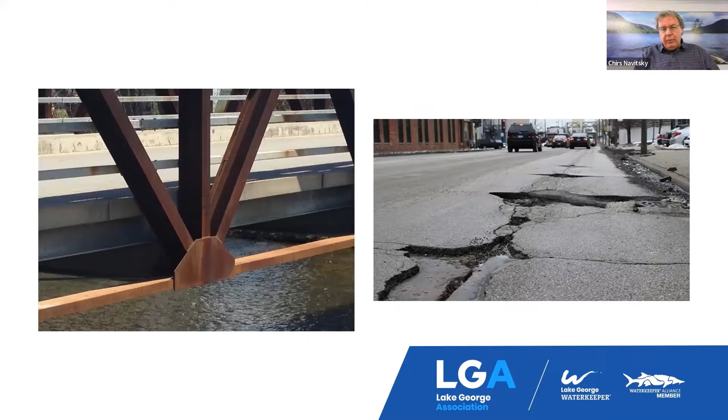So is salt really that bad? I mean, yeah, it causes corrosion, personal impacts, car destruction. We've all driven along the roadways and seen the burn on our trees, on our evergreens. It's said that 50% of the salt that gets applied to the roads actually gets into our soils and into our groundwater, and we'll talk about that in a little bit. There's corrosion to our public infrastructure, our bridges, our roads. The ice and snow get into the cracks in the roads with the freeze-thaw, and we are just going to be getting into that infamous time of year. So it does cause problems.

I love Maine lakes, I gotta say. I've kayaked on many of them, all the way from the Richardsons and Mooselook, Mooselookmeguntic, up through Moosehead and Chesuncook. So I'm gonna take Susan up on the offer to come up for our conference, but I love to get away.

But I wanna tell you about my favorite lake, Lake George. The largest lake in the largest park system in the continental United States, the Adirondack Park, 32 miles long. A famous lake; some of the first battles of the American Revolution were on Lake George. In the 1800s, the landscape painting schools were big here, with the dramatic vistas and the tranquility of the lake. 175 islands, many used for camping. It's a big resort tourist area, and that's our big economy. That's the Sagamore Resort on the island.

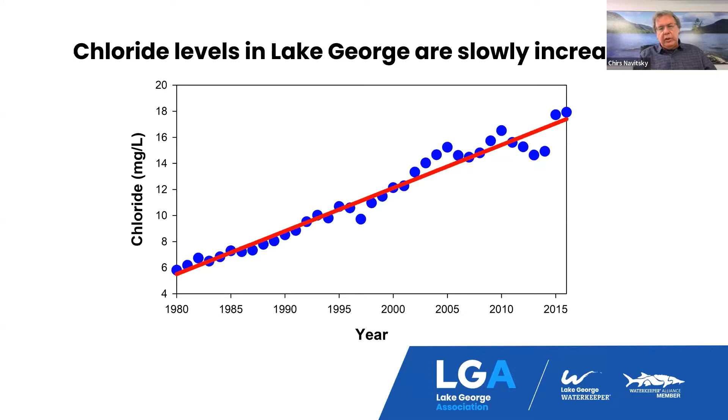We all realize that chlorides build up, they're conservative, and once they get in our waters, they are in our waters for good. We're very fortunate to have numerous organizations protecting and doing science on the lake. Around Lake George, they said there's 15,000 metric tons of public salt application annually. And that's only the public side. SIMA, the Snow and Ice Management Association, the industry that really oversees winter management, says that half of the road salt application is private.

So you can almost double that. So it could be as much as 30,000 metric tons of salt. So if it's 15,000 metric tons, you take railroad cars, that's nearly 300 railroad cars, nearly 3 miles long. So that's quite a bit of salt that gets added to our watershed, to our waters.

And we worked with the Albany Times Union out of Albany, New York, had them do an editorial, and this was what they used to put the editorial together and help us address our salt concerns.

But as with most watersheds, the chloride levels... Lake George is a big lake, billions of gallons, so it gets diluted a lot, but the chloride levels in streams can be 150 times higher. And this is where we see those toxic levels that can really impact the biota and the macroinvertebrates, and we'll talk about those impacts as well.

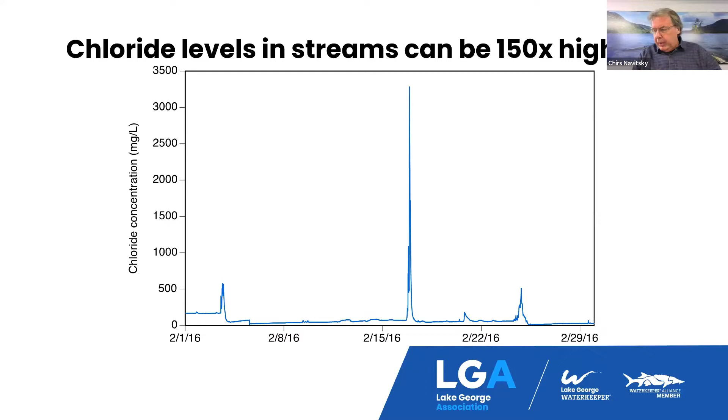112 wells were near local roads that are managed by local municipalities, and 114 of the wells were near state roads. And as we know, about half the salt actually enters the soil. So here are the results. Here you can see the amount of salt that gets added to state roads, and you can see the levels of sodium increase, 9 times higher than where there are no roads.

64% of the wells in this study downslope of state roads exceed sodium drinking water guidelines in New York State. So people with sodium restricted diets are now actually getting impacted by the winter maintenance. Look over at chlorides, you can see 156 times what we call background levels.

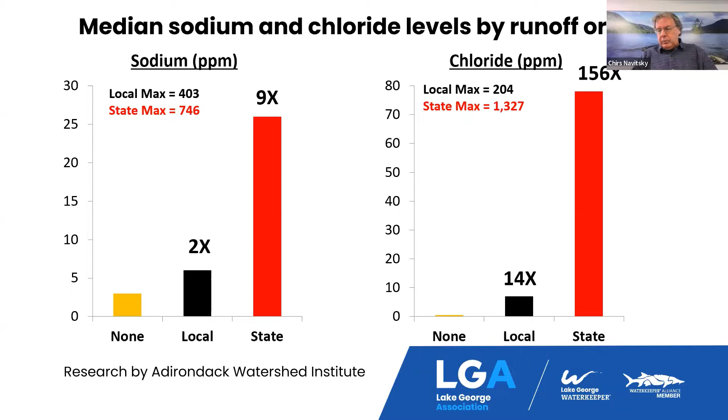Here you can see the maximum levels near state roads, the maximum level of chlorides in wells, over 1,300. The toxic levels on a daily average are 900 milligrams per liter. So here you can see they're well exceeding that. So yes, there are concerns, but it's not just our drinking waters, it's also our ecosystem.

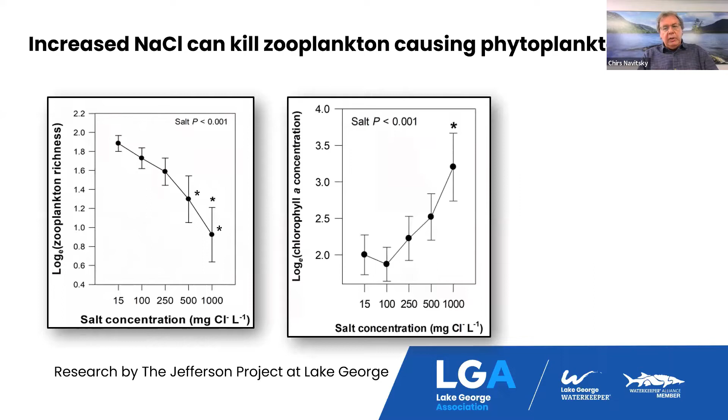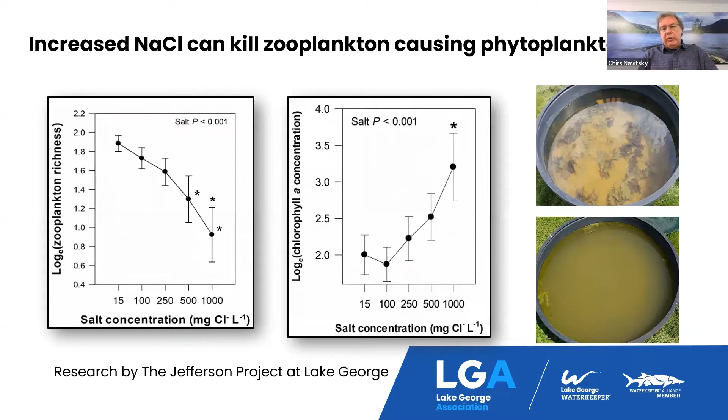Salt can alter that important balance between the zooplankton and the phytoplankton, the zooplankton eating the phytoplankton, which really results in the bloom. So here you can see with higher salt concentrations, the zooplankton go down, which leads to increased chlorophyll A levels. And what does that mean? That means increased blooms. These are from studies done by the Jefferson Project, our partnership with IBM and Rensselaer Polytechnic Institute on Lake George.

Here's something else. Creatures such as the banded mystery snail and the amphipods can graze on the algae and what grows. But here you can see as more salt gets added, these creatures are impacted by salt and can start dying off, and we see their abundance decrease.

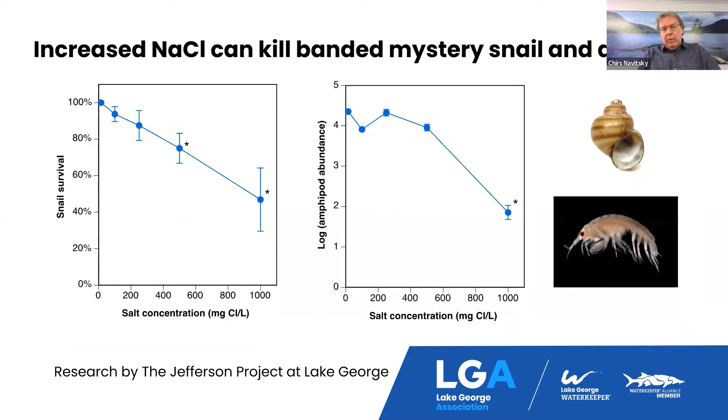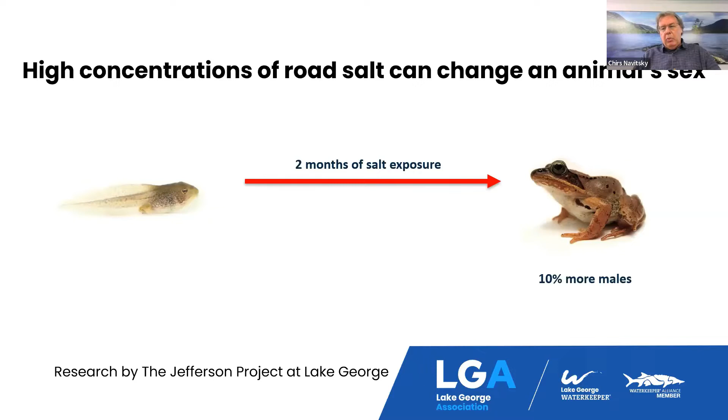But it's not just the numbers of the creatures, it's actually the sex. Here are studies done, again, by the Jefferson Project that said that due to particular amounts of road salt, 2 months of salt exposure can actually start changing the sex of frogs, in that there will be more male frogs than female frogs.

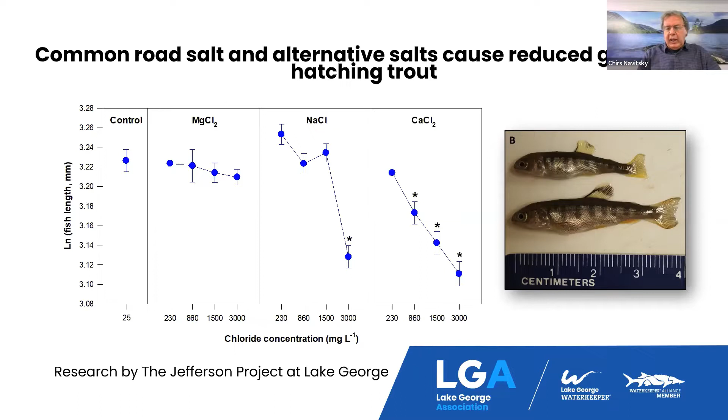If you have the chance, take a look at the studies of Mirror Lake and Lake Placid, where some great research has been done showing that road salt densifies water, and that will sink to the bottom of the lake. And that is preventing the natural turnover of the lakes, which occurs twice a year, and is really impacting and restricting the areas of the fishery. It restricts the reoxygenation of the water column. So it can have some significant impacts.

So as we get into this, what are the solutions that we can have? Well, here's one. We can always stick big tires on the trucks, and sorry kids, no more snow days. And, you know, that's one way that we can start to address this situation.

But the approach that we've taken here in Lake George is that we've implemented what we call our model for protection, where we actually take partnership, innovation, and investment as an organization. We like to work with our science to solutions approach. And this is how we started addressing what we called our road salt reduction initiative. So I'll start moving into that.

So when we talk about partnership, our work on Lake George actually started before road salt reduction with aquatic invasive species, where we started the SAVE Lake George Partnership, which stood for Stop Aquatic Invasives Entering Lake George, where we got all the municipalities around the lake. There's 9 municipalities, and we got them to sit around the table, got an MOU, got all the municipalities to sign that, and that's where we implemented the first mandatory inspection program east of the Mississippi on Lake George.

But as we had everybody at the table, we said, let's take a look at our next issue, road salt. So we got them to sign an MOU regarding the application of road salt for winter maintenance and de-icing. We based it on science. Again, that's what our approach is, on science, our decades of science and data collection. And we also got a basin-wide commitment on this.

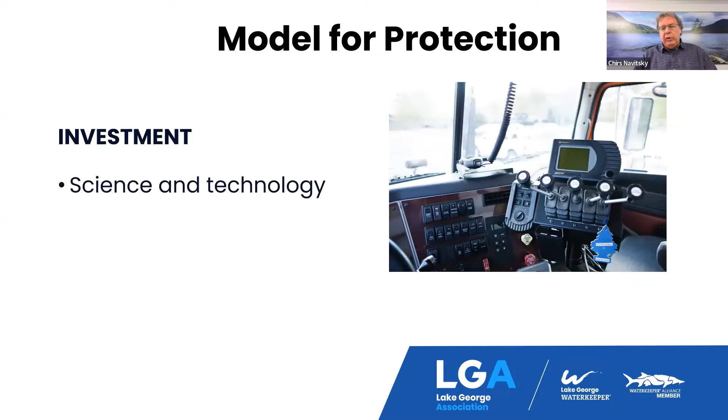And then investment. This is where we kind of like to say we separate. So we actually put the money where the mouth is. Here you can see what we call the black boxes, or the data trackers, in the cabs so that we started tracking the salt and knowing what they were putting down.

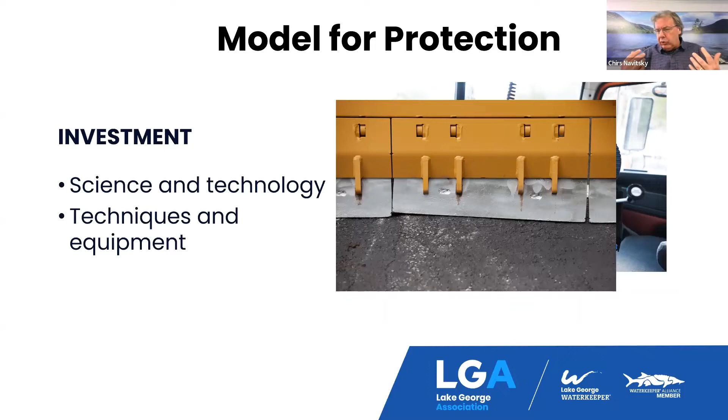The techniques and equipment. Who doesn't like new equipment and better toys? And so we started investing in having partnerships with these various suppliers, and education and training. Training, bringing the experts in, talking about the practices. And it took a lot of donuts to get these guys' attention as well. But with that investment of equipment, experts, knowledge, and as I said, donuts, we got their attention and we started making progress. And we'll get into that right now.

So I'm going to talk now about the 6 best practices, which are measure, calibrate, prevent, analyze, improve, and optimize. So we will go through these. So measure. If you want to reduce road salt, you've got to know how much you're putting down first before you can say, we're going to reduce our road salt. People say, well, we don't want to apply more than 150 pounds per lane mile. Well, what are you applying right now? If you don't measure that, you're not going to know.

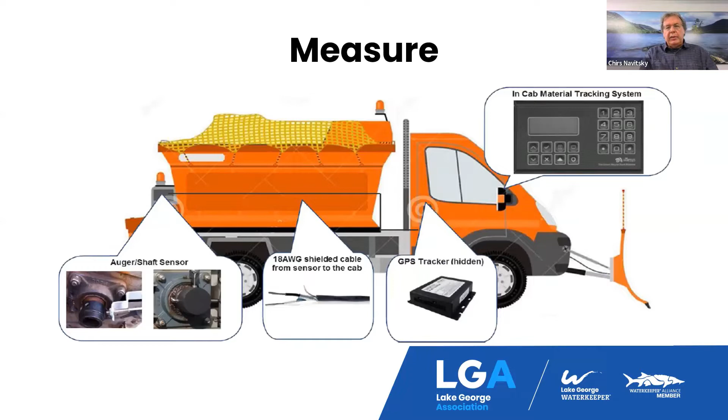So that's what we first started doing, taking these tracking units and putting them into cabs. It was a little difficult at first. The operators were thinking, oh, Big Brother's going to be looking over me and whatnot. But then as we developed, we turned this into more of kind of a challenge event.

So here you can see actually a video. So this is what our consultants would see. We worked with De-Icing, a company out of Waterloo, Ontario, who developed this software. So here you can see the trucks going through, and every 30 to 45 seconds, a ping would go up into the cloud. And of course, we all know where the cloud is, right? But we would record how much salt they're applying. And then we could go back and start comparing those application rates for truck A versus truck B.

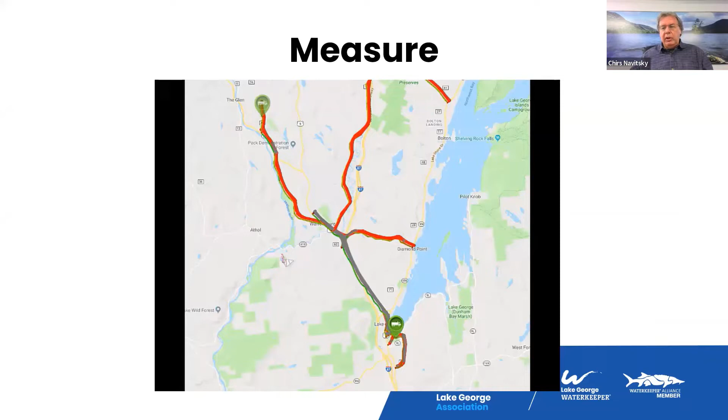And if they both reach the level of service of bare road conditions, but truck A was applying twice as much road salt as truck B, why was that? What were the conditions and what were the actual decisions that were making those decisions happen?

The second practice, calibrate. This is critical to the process because this equipment takes a beating. They're dumping tons of corrosive road salt on. Road salt can bind up, clump up. You can ask an operator, their gates are open 4 inches, and we go, how much are you applying? And they say, well, I'm putting down 200 pounds per lane mile.

So we would actually put a tarp down, run their machine, see how much they were dumping, and then measure that. And sometimes we found out that they were actually adding twice as much road salt as what they said they were. So calibration is a must. Calibration needs to be done at least once a month. We've gotten municipalities to start doing it twice a month, where when we started this initiative back in 2015, they may have been doing it once a season if we were lucky. So really calibrating is important, so you can actually see and measure how much you're putting down.

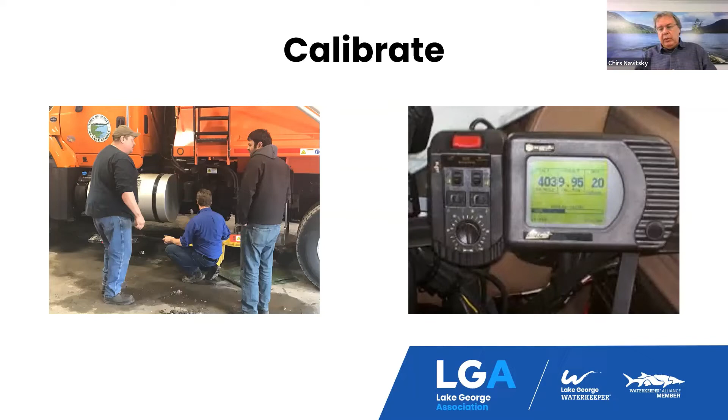The third step, and where we started really gaining the attention from the operators, is prevent. To prevent the bond of the snow to the road, to prevent that snow from building up into ice. Because once it builds up into ice on the road, then you're scrambling, then you do have to dump the salt on. So what we have here is a picture of a live edge plow. So one way is to remove it more efficiently.

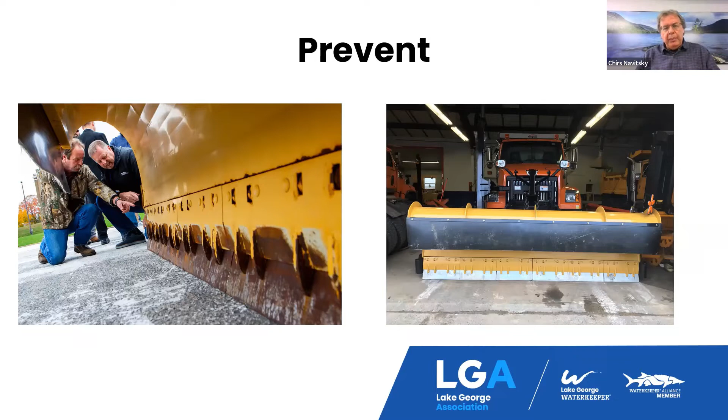And here you can see, instead of a straight 11-foot blade across the bottom, this actually has several segmented metal plates that conform to the road better. Think of the way a razor's multi-blades conform to your face when you're shaving. This is the same way that it reacts with the road. And this is where our initiative really took off. When we started, we hooked up with a company, Metal Pless, with live edge plows. And you can actually see the way that this plow will bend and conform to the road. So it is really removing much more snow from the road, preventing that buildup.

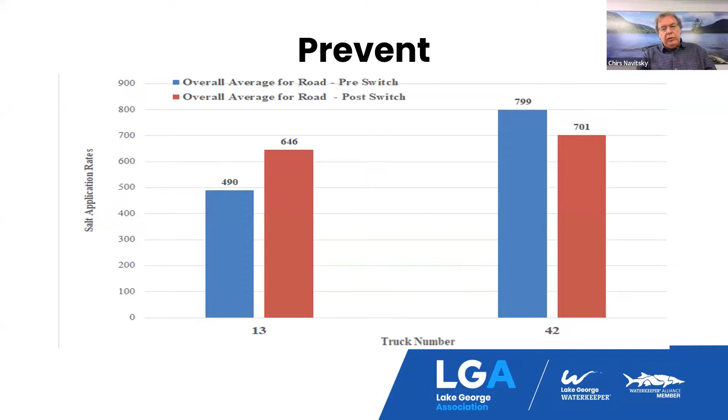And this is where we actually used that data collection to show that we were effective and efficient, and this was reducing our road salt. So we were in the town of Lake George. Truck 13 had the live edge plow for the first month. This was a couple years ago. Truck 42 did not. And you can see the discrepancy between the two application rates. What we did is after a month, we switched the live edge plow from truck 13 to truck 42. And what we saw was that truck 13's rates went up 25%, but truck 42's rates actually started coming down.

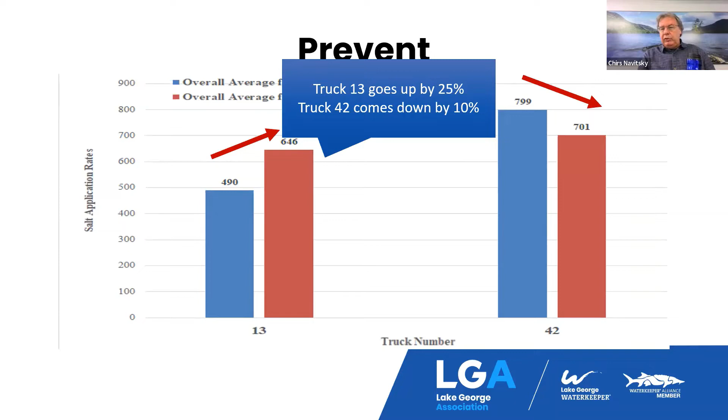And this is when we started to get the attention of the drivers, when they really started believing, and then there started to become a competition. And once you got that, you had their ears and they started listening. There was one highway superintendent, when we started this initiative, he was a true curmudgeon. And he just said, there is no way this is ever going to work, and I am not going to do this. And when he saw these live edge plows, his literal words to me were, I will eat crow, because this stuff actually works, and he saw nothing that worked better, which was quite a change. And that's when we knew we were finally getting somewhere.

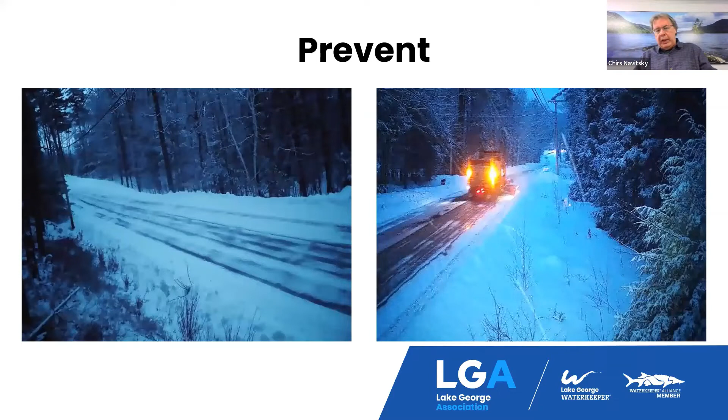Excuse me. So I mentioned earlier, cameras. We started putting roadside cameras up along the road, and then we could see the effectiveness of the live edge plow during particular routes that had the same grades, the same elevations, but the one truck had a live edge plow, the other didn't. You could start seeing how more effective they were.

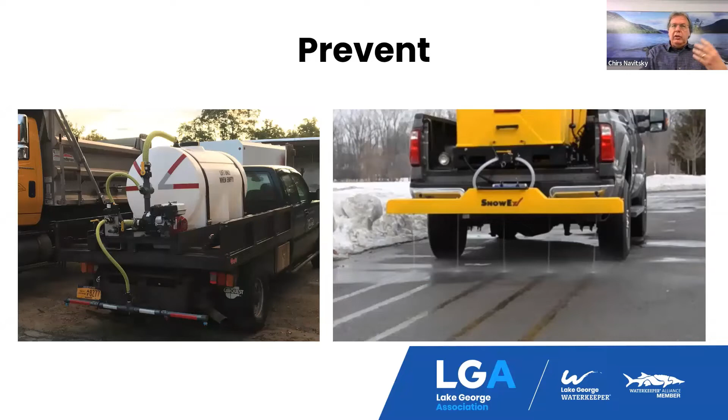Okay, what else? Another practice to prevent the bond is brining, which is really the pre-application of salt water. So what you basically do is you go out ahead of the storm, a day ahead, and spray the road. Think of the way that you coat a pan before you cook, so you don't want your food to stick. So it really helps prevent the bond.

It buys more time. If you go out and spray the road a day before the storm, you can actually buy those operators 2 hours in the morning. So instead of having them come in at 3 in the morning, they can come in at 5, which is a lot when they're putting in 10 to 12-hour days.

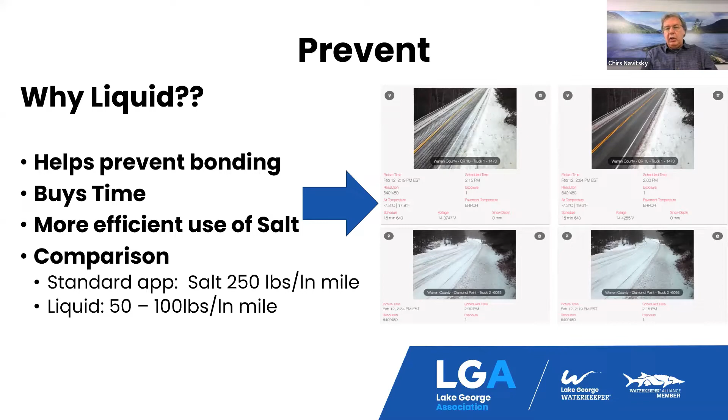And then you could do the comparison. Your rock salt, 250 pounds per lane mile, but when you use liquid and brine, you're actually reducing that application rate to 50 to 100 pounds per lane mile. Less salt being added, more effective. It reduces that scatter, stays on the road. And as soon as the snow comes, it will liquefy and create that liquid that will prevent the bond.

So this is where we started analyzing as well. So this is a series of camera shots from these conditions. So here you can see the way the conditions change. This is when we started bringing in weather analysis and forecasting and reports, starting to learn the temperature of the roads. Road temperature sensors are very important to know what the temperature of the road is. Is it going up or down?

And then start seeing what the removal rates are, and then comparing route to route to see how they are doing. And one of the best things is you get to the end, you'll actually see, it's always said that the plow operator's best friend is the sun. And you can see at the end of this, the way the sun comes out and really starts clearing that road. So we started analyzing, using these cameras really helped the operator.

It also helped the operators because they could actually remotely check these cameras and see what the road conditions were, and then make a decision whether they needed to send their crew out or not. Here's another analysis. We started moving from the roadside cameras to cameras on dashboards so that they would patrol areas, because there's always areas on their routes that would be colder than other sections where they don't get the sun, where there can be more buildup.

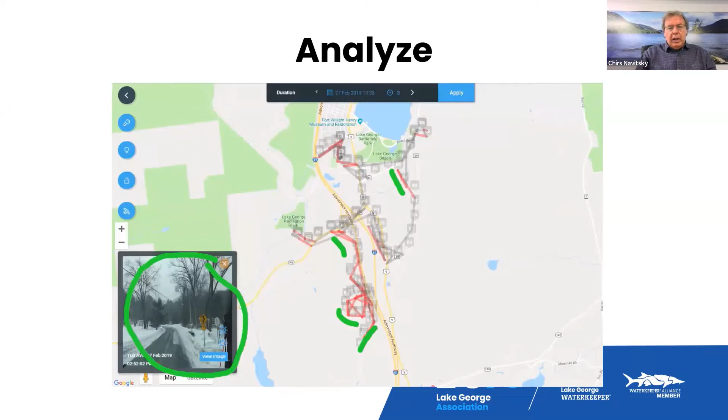So here you can see a series of dash cams where they are seeing that there are clear road conditions and they can turn off their salt application, or where there are steeper conditions, higher elevations where they need to use that road salt. So we want to take these conditions that you see circled right there and get more of a condition like this. So how can you do that analysis, understand what your route is, your road conditions, and make better operational decisions.

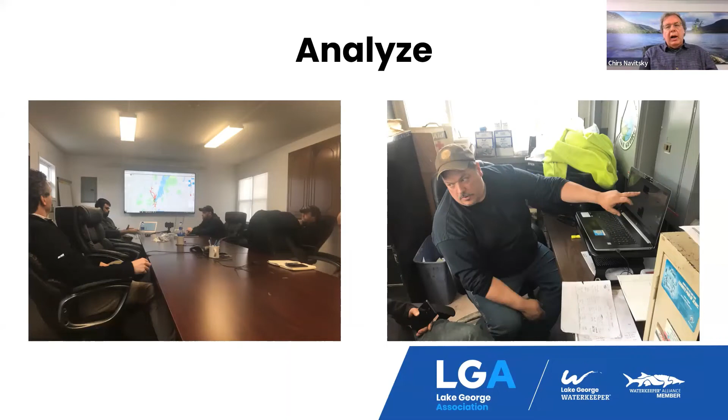Then we started bringing our experts in again. I mentioned Rakib Mir from VASIS, from up in Waterloo. We worked with Phil Sexton, WIT advisors. And we worked with the operators, started showing them the routes, started showing their application rates, asking them what their decisions were, why truck A versus truck B was adding twice as much salt, what the weather conditions were that precipitated that. So analyze, that's our fourth practice.

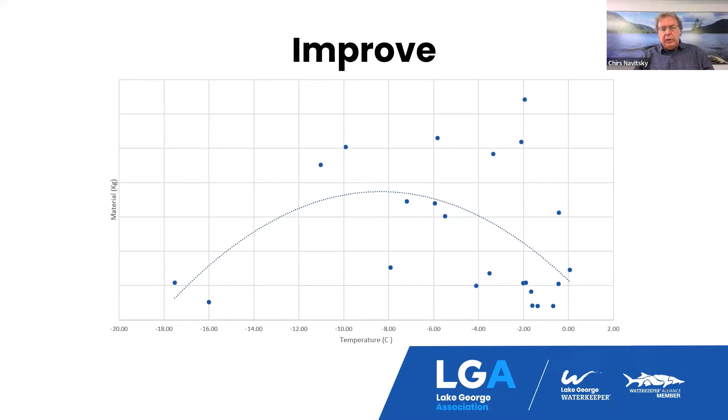But what you really want is a graph like this. So this operator understands you do not add as much when it's very cold, or when it's near freezing, you don't need to add as much, because a lot of times the roads will take care of that, the heat that's on the roads. And then you want to maximize it when your temperatures are allowing you to maximize it.

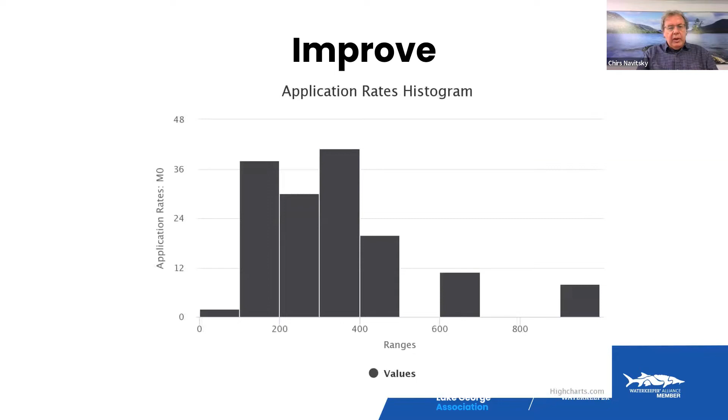So that's when we talk about improving. Improving, again, we were talking about the graphs, and I showed you a few of those. What we always like to show our drivers: on the bottom, the x-axis, the number of pings, or every 30 seconds, what that application rate was. And here you can see the applications on the y-axis. So we always want our operators to have those histograms move to the left so that we can start reducing those road salt application rates.

And when you start putting all these practices together, you can optimize. And when I mentioned the SWIM certification earlier, this is what we're talking about. So sustainable winter management. So when you take the measure, calibrate, prevent, analyze, improve, and then optimize your practices. And this is actually a certification that we are working on with WIT advisors. Phil Sexton has developed this, and we have 3 of our municipalities now around Lake George that are SWIM certified, and doing these measures that optimize their road salt reduction.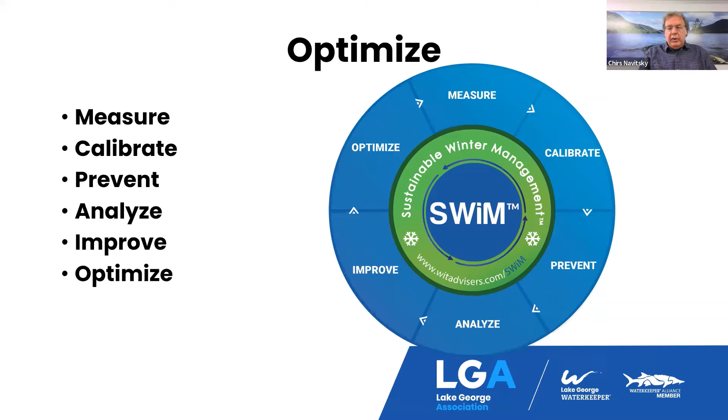So is this really working? You know, I showed all these pictures, the equipment, the graphs. Well, the proof is our little town of Hague that I live in. We have about 800 year-round residents, and they have actually become the leader in the road salt reduction initiative around Lake George. So the proof is in the numbers. We started working with them in 2016. They didn't even want to work with us in 2015 when we started the initiative.

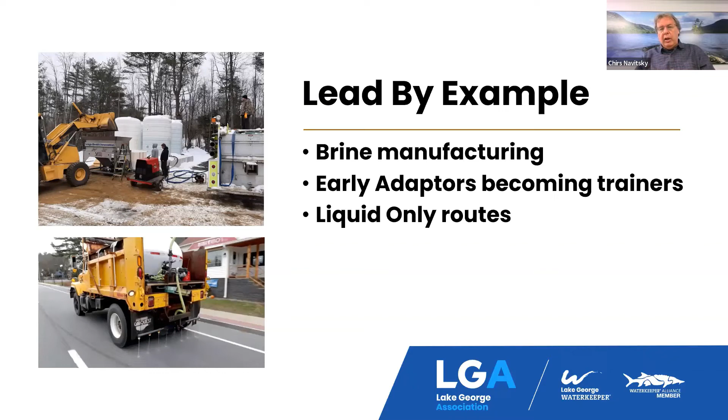The town of Hague, they're actually considering liquid-only routes. They're not even going to use solid rock salt on some of their routes. They're only going to use liquid, and as you saw, that can mean significant reductions in the amount of chlorides added. Use data and verify with cameras. Again, use that measuring device, use the cameras and validate those numbers, and they're committed to progress.

You know, it took what we call the leap of faith to have them listen to us, but now with these successes, they're actually seeing the benefits. They're seeing the reduction in their budgets for purchasing salt. The town boards are seeing that, giving them the big attaboys. They save the money, and now they can get some better equipment.

So our next steps, we want to continue with the brine expansion, let more municipalities understand that. As we said, it's a leap of faith to get them to trust this technology and this practice, but it is working. New York State DOT, the biggest applicator of road salt in our basin, we actually got them to come on with a pilot study, and here you can see a sign in our watershed, low salt area, so they've actually committed to a reduction pilot.

Governor Hochul right now has set up a road salt task force. I'm pleased to have been appointed to that. And we are actually going to be taking a look at that statewide and pointing to Lake George as one of the models for that. The private sector, again, we did focus on the municipalities because we were able to get them to the table.

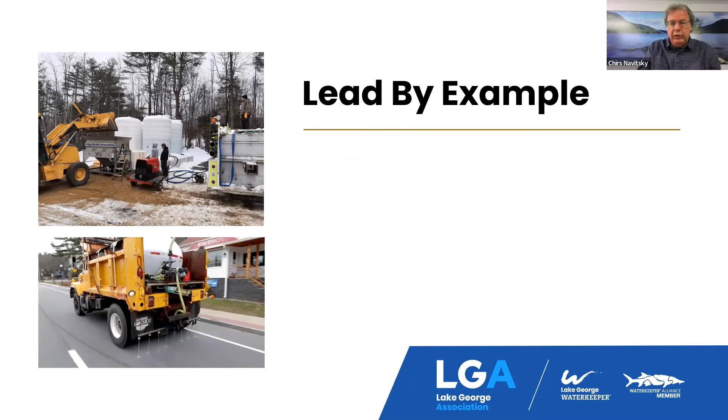And we found that if we reduced road salt applications in the Lake George Basin by 50%, it would take about a 20 to 25 year period to see that change in the lake itself. Now, we started seeing it in Hague Brook, as I showed in one of these slides. But in the lake, we haven't started seeing that, and it's going to take a while, and it's going to take a concentrated effort from all municipalities.

And the way that we did that, we actually used some of the other cations, such as calcium, because as sodium chloride is added, it breaks down. Sodium would actually attach to the soil particles and release the calcium and the other cations. And we saw that increase or decrease depending on the application rates in our streams. And that's how we calculated the model that would show the reduction in Lake George. That was a published paper. I'd be glad to share that with folks if they're interested.